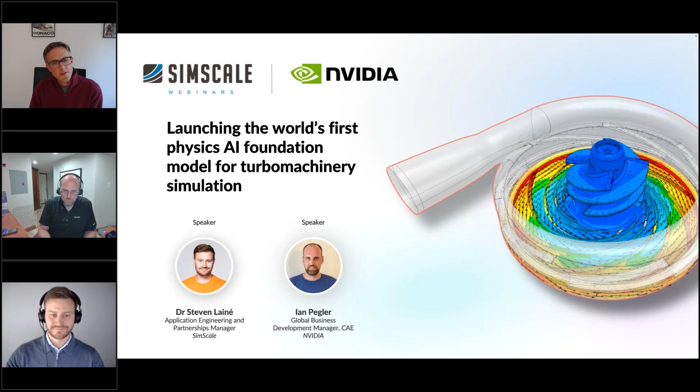Perfect. Thanks, Alex. So first of all, I'd like to give a very short introduction to SimScale, and then Ian will give us a short introduction to NVIDIA and the technology that's being used today. And then we'll get into the details of this exciting foundation model that we've released for pump design, including, of course, some live demos of this capability in SimScale.

So first of all, welcome everyone, and I'd like to introduce SimScale first. So we're an established simulation company. SimScale runs entirely in the web browser, in the cloud, so you'll see that during the demos. And we have about 600,000 users worldwide now across 50 plus countries. There's millions of simulations being run all the time in SimScale, and we're top of the leaderboards for G2 reviews for our software. So if you don't already know who we are, go and check out simscale.com and you can sign up and give it a try.

And what do we do? Well, our ethos is to empower engineers to innovate faster. And we do this by providing a high fidelity simulation tool that's truly accessible at any scale. You can see across the bottom of the screen some of the organizations that we work with. Many more, of course, we're not allowed to mention, but Rimac Automobili, the Croatian hypercar manufacturer, is doing just this. They're empowering their engineers to innovate faster by using SimScale. In the early stage in the design process, the designers are iterating very quickly through cooling channel designs using SimScale's platform.

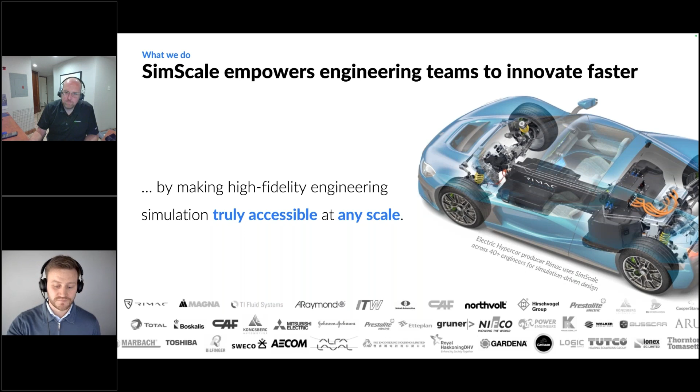So just another couple of overview points on SimScale, and then we'll get into the NVIDIA side. So SimScale is finding a lot of success in the industry by reducing simulation lead time, and we're doing this by an order of magnitude. Thanks to the differentiators of SimScale being completely cloud native, you don't need any local HPC or hardware to run simulations. Because SimScale is fully hosted in the cloud, it's very easy to collaborate. So wherever you are geographically, you're logging into the same cloud servers when you share a project and accessing the same data. This means that you can simulate across borders without having to transfer large data sets.

SimScale is completely scalable, so you can run really large simulations, you can run a lot of them in parallel, but that scales with your needs. So maybe today all I want to do is run a simple FEA linear analysis. When I submit that, a small machine in the cloud will be started, maybe a 4-core machine. But then tomorrow, maybe I want to run 1,000 conjugate heat transfer CFD simulations in parallel. I can do that without having to switch on any special license. I have that capability at my fingertips.

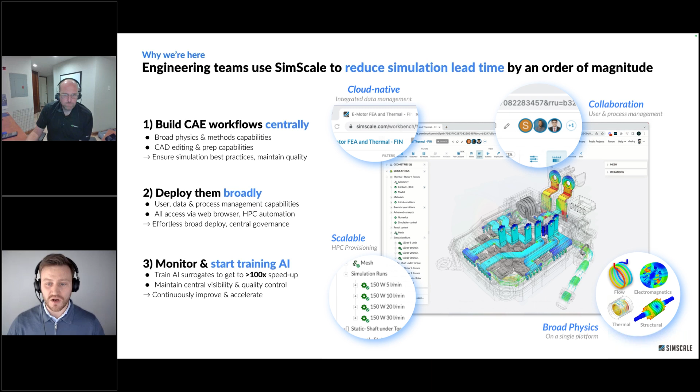So we have a broad physics capability as well. You can do thermal, structural, CFD, and electromagnetic simulations all in one simple, easy to use interface. And of course, all of that can be used to train AI models and surrogate models to get more than 100 times speed up in your simulation and maintain the access control and visibility through the organization of those AI models. And we'll show that in the demonstrations.

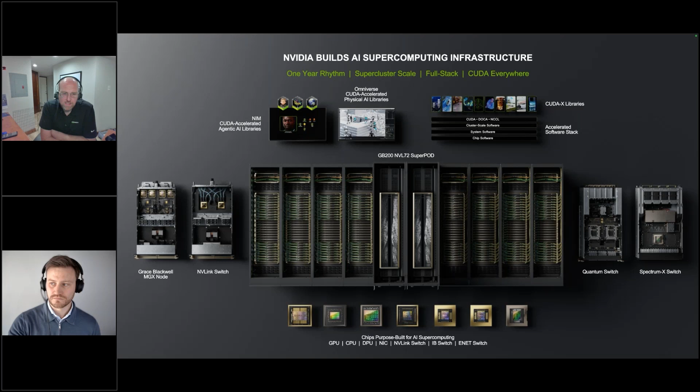And then sitting on top of that is probably our kind of secret sauce really, which is all of the software libraries that enable our development partners such as SimScale to build these awesome solutions. So CUDA, and then a whole range of other libraries to enable different use cases. So if we move to the next slide.

And why do we do this? What are we trying to achieve when it comes to computer-aided engineering? Well, ultimately, the story I think over the last few years of computer-aided engineering is we want to do things faster. Back when everything was testing based, you could potentially do one test a week of a design variant. And then obviously computer-aided engineering came along and we could quickly start to simulate these physical tests and maybe do one a day. And then with accelerated computing using GPUs, we can start to do even more different iterations today.

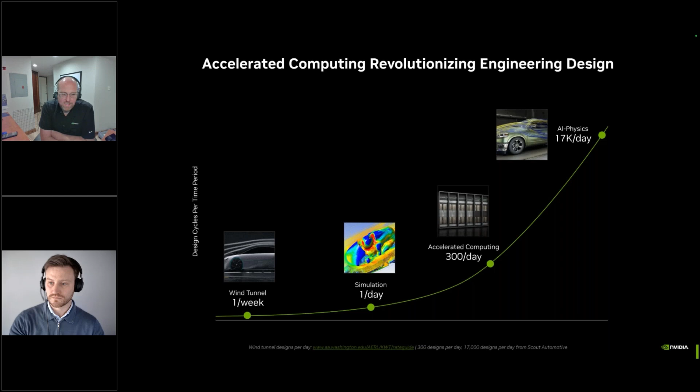And now with AI approaches, potentially we can run 17,000 different iterations of a design a day. So what it allows us to do is obviously hopefully make a better, cheaper product, because we can look at so many more different variations. So that's what we're really trying to enable, right? This revolution in engineering design to really improve the design in a much shorter time scale.

So we move on to the next slide. Then specifically when it comes to computer-aided engineering, how can we help accelerate that? We just spoke about PhysicsNeMo, but there's also a ton of other libraries and tools that we use. So CUDA, obviously, most people might be familiar with that - this is the way that you can program for the GPU. Then we have obviously PhysicsNeMo to generate the physics-based AI models. Then Omniverse is a kind of platform that allows people to create digital twins and bring different data together to create this digital twin experience.

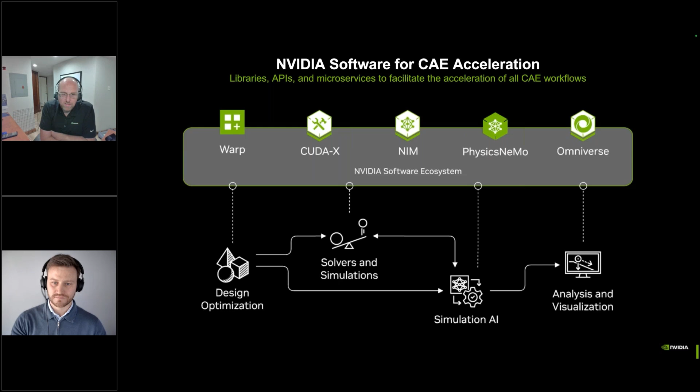But the key thing I always say to people is the key thing to remember about NVIDIA is we are a platform company. You know, we don't make tools. We build this platform for SimScale to build their tools on to take advantage of this underlying technology. So that's why I'm super happy to be here today to showcase what SimScale have put together using PhysicsNeMo into their platform. So if we move to the next slide, this is a little bit more about PhysicsNeMo.

So this, like I said, is our library of different AI architectures, basically, to help with traditionally computer-aided engineering problems. We've done use cases that cover all of these different application areas. So, actually, on the right there, cooling system design.

If you look closely, you might be able to see that looks like a GPU in a computer, and this is really where PhysicsNeMo came from. Some of our own needs to actually cool our own hardware, and then we developed it into a library that other people can use as well. One of the great things about PhysicsNeMo is it's not supposed to be a replacement for any traditional CAE, but hopefully it's a way to iterate faster and get more design iterations assessed, and give you a better design at the end of the day.

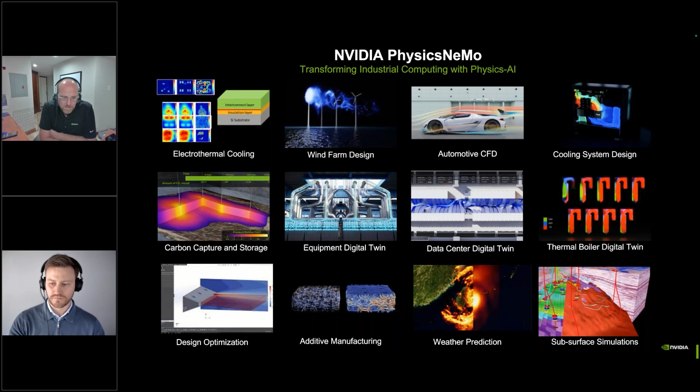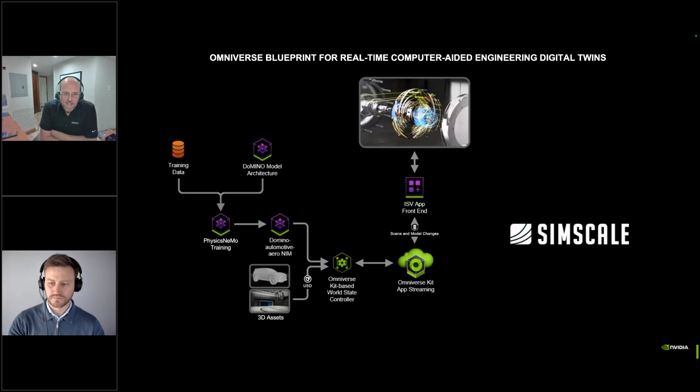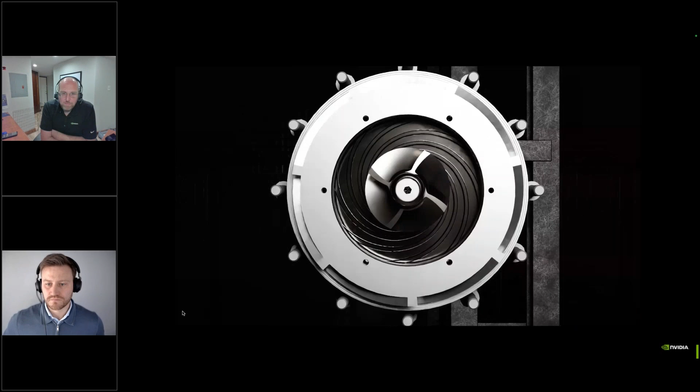So if we move on to the next slide, I like this slide because it shows perfectly how SimScale have leveraged some of the NVIDIA tools to build what Steve will show you in some of the demos after me. Taking some of the underlying tools we have, PhysicsNeMo, this framework, and the DoMINO architecture you see on the left, and integrating that to create the underlying pump foundation model, then integrating that into the SimScale platform to make it easy for you guys to use. You also see a nice animation of the pump, done using the Omniverse APIs. If you'd seen the NVIDIA GTC keynote session, you would have seen this video as part of the keynote as well.

So just shows you how we can help take some of the visualization stuff to the next level with some photorealistic rendering and bringing all this CAE data into one place. So hopefully that gives you a bit of an introduction to how NVIDIA helps accelerate computer-aided engineering, and particularly how SimScale have leveraged some of these platforms to help build this awesome pump model that's now integrated into their platform. So to get to more details, I'll hand it back to Steve to take you through.

Perfect. Thanks for that overview, Ian. It's really insightful. So what we're going to talk about now is exactly what we built and how we built it to deliver this pump foundation model, and also a bit of information on our strategy for AI in SimScale.

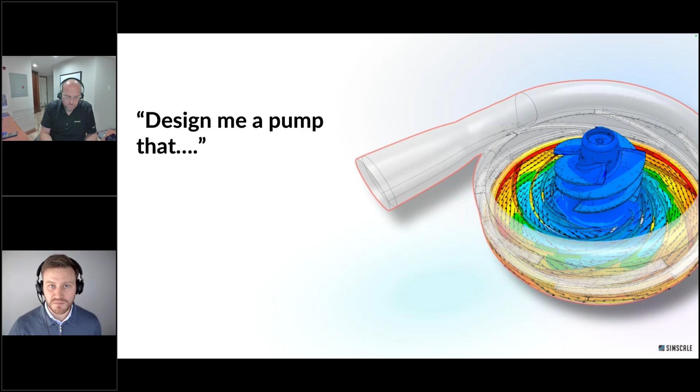So ideally, what we're aiming for here is a situation where you can say, design me a pump that achieves these requirements, has this pressure head, is the most efficient possible pump, pumps this type of fluid, and is this type of pump design.

Things like copywriting are being revolutionized with the use of LLMs and prompting. It's very easy to improve the readability of some text or do some background research.

Also, for image design, it's very easy to generate images that are royalty-free and show some of the specifics that you want to show for certain products or types of engineering.

And also coding, especially for people that don't code every day, the use of IDEs with embedded AI algorithms and LLMs are really helping to generate code and debug issues in code as well. So these things are all proven technology and they're already well adopted in the engineering industry.

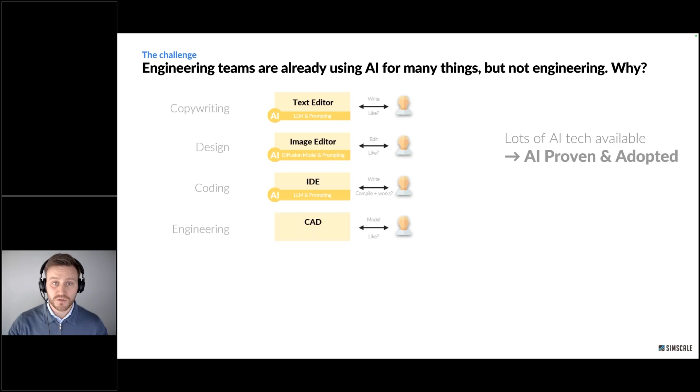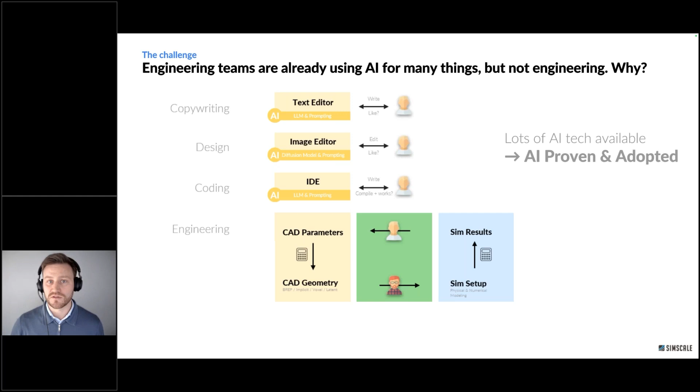But when it comes to the core engineering, so the design and simulation process, things are not so well integrated yet with AI. We're still using parameters from CAD, creating traditional geometries, be it BREP or implicit style geometries, and then sharing that with separate teams or separate pieces of software to run simulation setups, generate simulation results, and then loop back through to change the CAD and go through that loop again. So the steps between CAD engineering and CAE are fairly disconnected. There's no universal data type.

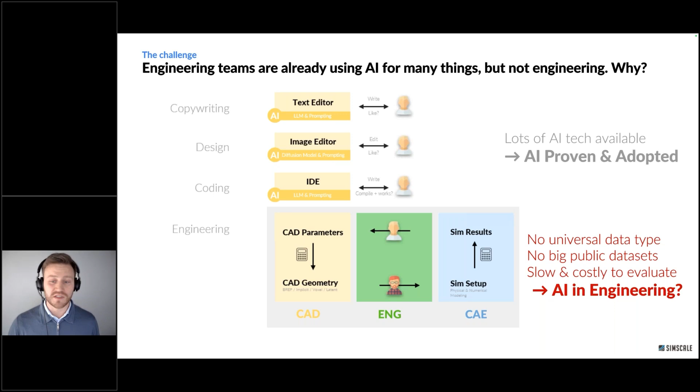And crucially, there's no large public data sets available to train these things on, so it's relatively slow and costly to evaluate. One of the great things about the internet is it provided a huge source of data for LLMs to learn from. But engineering data is typically intellectual property and it's not published widely for people to use to train AI.

So we had this come up a few weeks ago. It was actually Alex that came up with this idea, and I thought it was a great thing to cover today: the differences between using an image prompt versus actually doing engineering with AI.

So in order to address this, in SimScale we have 2 approaches right now. We're covering engineering and agentic AI, as well as physics AI. Physics AI and engineering AI are going to be working alongside each other to solve the same sort of problems. First of all, I'm going to focus on the physics AI.

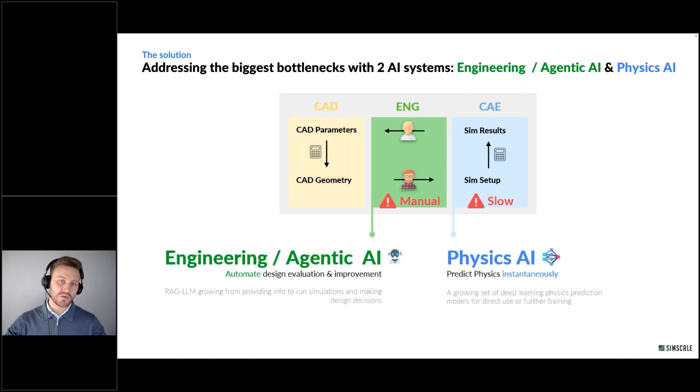This is the application where we've developed a foundation model with NVIDIA PhysicsNeMo for the pump situation. Then at the end, we're going to also look at the engineering agentic AI process and how this can all be pulled together with an AI agent to simplify the workflow.

So let's think now about how we build a foundation model. With the status quo today, if you want to create an AI model, what do you have to do to generate that? Well, the first thing is the data generation. You need to get your data in order, and you need to collate that from different sources, and prepare it so that it's ready for AI.

That might mean tagging, it might mean rerunning simulations. And then you need to prepare the AI model training. You need to have an infrastructure to manage that. You may also need to have the same simulations available that we use to train the AI, because when you do an AI prediction, you may not be happy with the results, and you might want to use the PDE solver technology as an alternative.

So this is the process, and what we're hearing from the industry is that it sounds great, but I don't necessarily have time to invest in creating this training data, or I'm waiting for the right project to come along that will give me enough data to train on. Or how do I know if it will produce sensible results for my application?

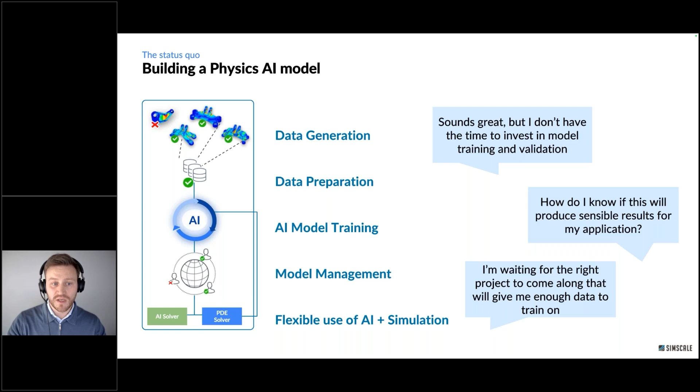So we're getting to the point now of the foundation model. And what is the foundation model? Well, what we've done in this first example is we've created a foundation model for a pump. This is basically a pre-trained AI model. You can take it today and use it on your pump designs.

And it gives you insights straight away, potentially. But the other fantastic thing about having a foundation model is it creates a base level, a base camp that you can use in order to create a highly customized AI model for your data.

So we've already trained the foundation model that understands the physics of how pumps work. It knows what blades do. It knows what a number of blades being changed does. It knows about the outlet and the inlet. And then if you take that baseline and you add in another 50 or so of your simulations on your specific pump designs, you'll then have a highly tailored AI model that can predict the performance of your pumps.

So the idea here is we think that this should help to reduce the barrier to entry on AI projects. And this is the first example that we've produced, and we're going to produce many more of these foundation models in collaboration with NVIDIA.

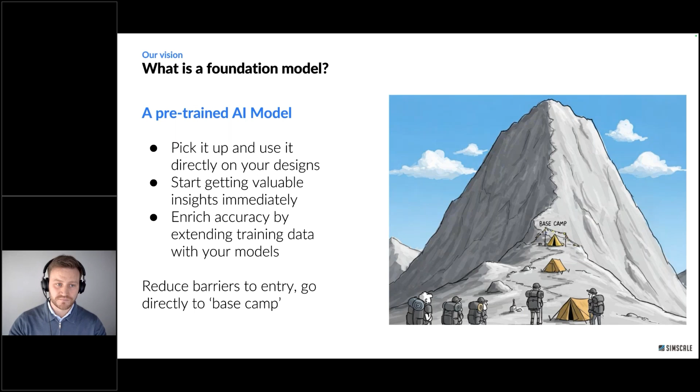So let's look at the foundation model for pump simulations specifically in a bit more detail now. So what we've done is we've created a large data set of pump models with a huge number of geometry variations and different operating points. All of this comes together into a simulation data set that has thousands of simulations in it. So this is the great thing about us making this available, because we've done a lot of the hard work to prepare this foundation model. It can basically be a training model that you use in the future for your own one, as I described.

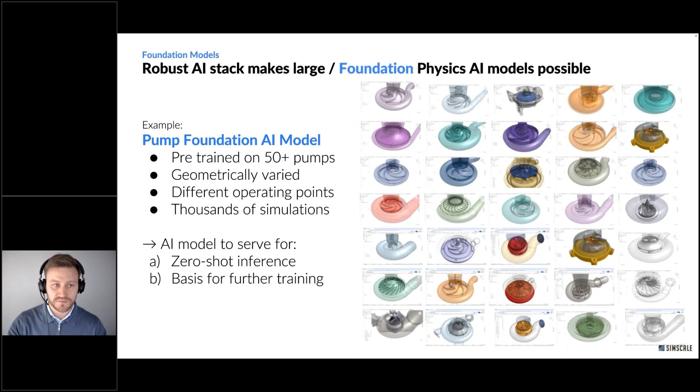So we took that large data set and then we used NVIDIA PhysicsNeMo to create an AI model, a graph neural network AI model, to be able to make pump predictions. You can use this through the UI, as I'll show you, but you can also use it to make instantaneous predictions of what the result would be for something like an optimization. And this is one of the really exciting applications that we're seeing AI models being useful for.

A traditional optimization study may take days or weeks to complete because you're fairly limited in how parallel those simulations can be, because you're reliant on the previous simulation finishing and the results of that simulation to inform the optimization algorithm what it can do next. But if that simulation is an AI model and it takes 1/3 of a second to complete, you can iterate much faster through those optimizations, and you can do a real-time optimization.

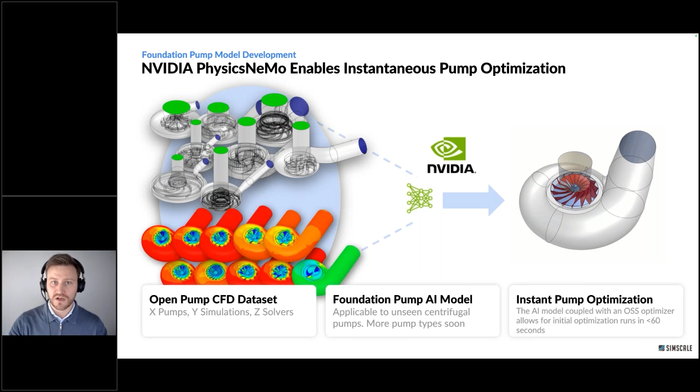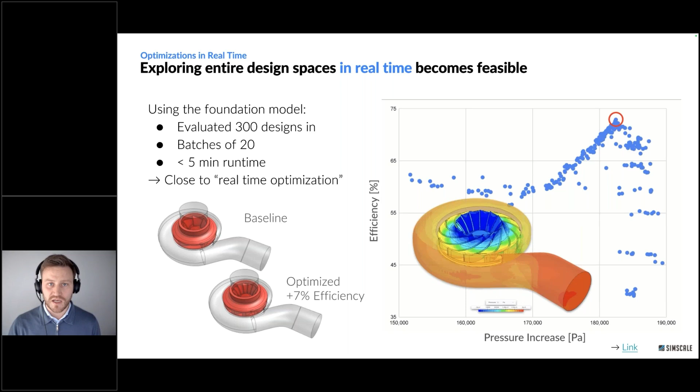And you can see how we're optimizing for efficiency versus pressure increase for this pump. And after each batch of predictions, the geometry is changed in order to hone in on the optimum efficiency area that you see in the top right of the plot. So you can obtain this within about 5 minutes, which is obviously ridiculously fast. And then you know the parameter space of interest for the operating regime. And then you can investigate this in more detail with full simulation to validate the results or use physical testing.

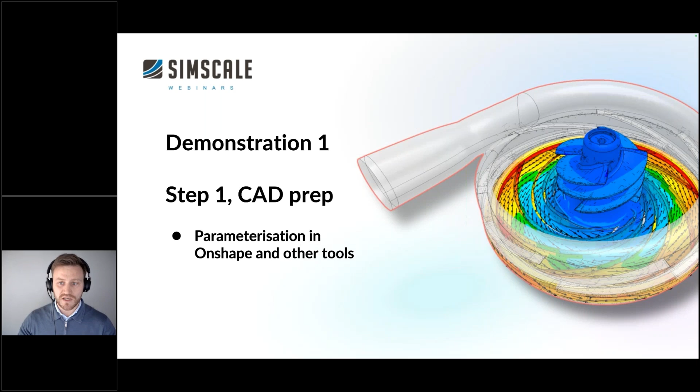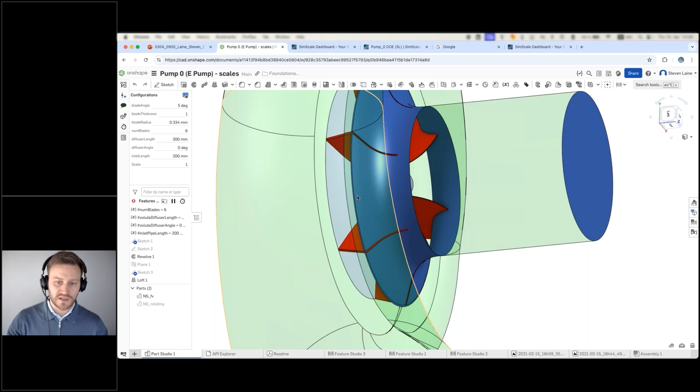Okay, so that's a bit about the background. And now I want to show you some demonstrations of how this actually works in SimScale and how we make this a reality. So for the first demonstration, I'm going to show you an example of how we set up the CAD geometries for the actual generation of the data for this foundation model. So I'm going to show you how this works in Onshape. This can obviously be done with any CAD tool. Siemens NX, Creo, CATIA, whatever CAD tool you're using can be used as the input geometry for generating a foundation model.

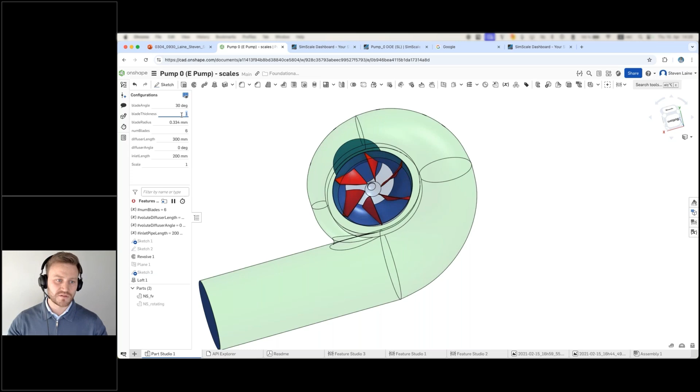So we created many different CAD models by parameterizing them, and you can see here the parameters that we can change, and I'll show you how this works through the UI. But obviously, in reality, this would all be driven via a script through the API. So if I change the settings that we have here, you can see the geometry changing. So if we change the number of blades to a much higher number, we'll see the number of blades generated increase drastically. And this is just how we build up the parameter set.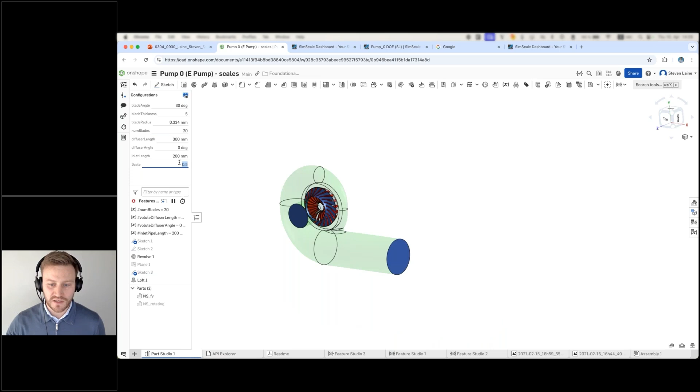And then obviously we're using a genetic algorithm or another way of iterating through all of these different CAD designs by changing the parameters that you see here, including things like scaling as well, so that we can understand how different sized pumps are going to respond, and as well the diffuser angle and diffuser length. So we're looking not only at the impeller, but also the volute, the type of pump, the diffuser, and this is just one of the pump geometries. We had many different pump geometries that were parameterized in this way to create the data set.

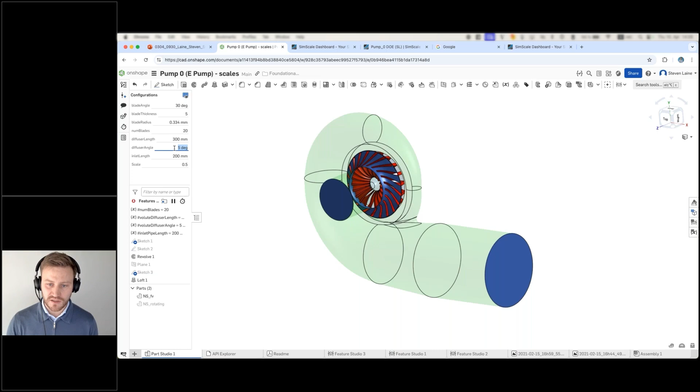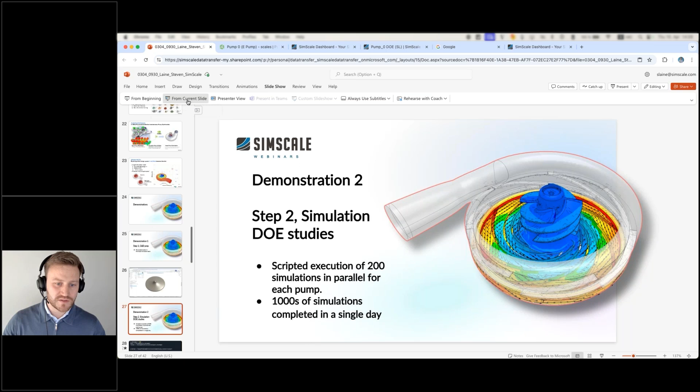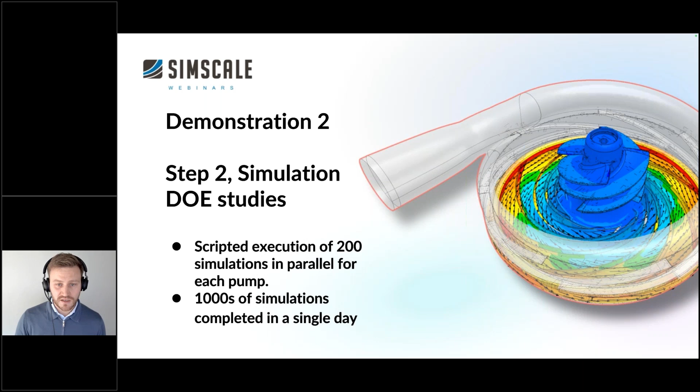Okay, so then that's for the geometry generation. The second demonstration I want to have a look at now is how we can actually execute this programmatically and create the data set. So in reality, there isn't very much to show here. I've got a very short video here which shows the number of lines required to actually generate hundreds of simulation-ready data sets from one of those parameterized models.

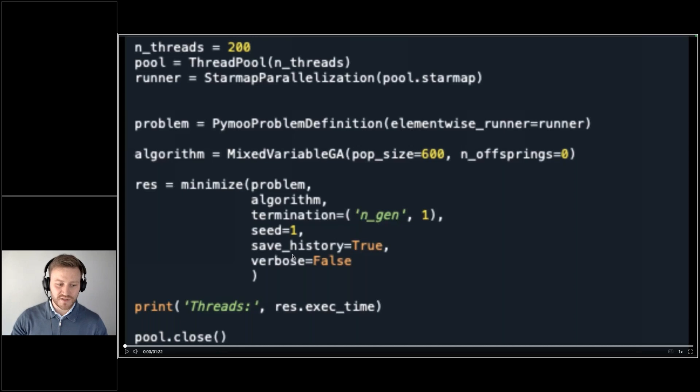So I really don't like showing code in a demo, so this is the only time I'll show any. But this is an example of what you need. So we're running 200 in parallel in this case, and then 600 in total. And rather than showing the rest of that video, I'll show you live in the platform what we have here.

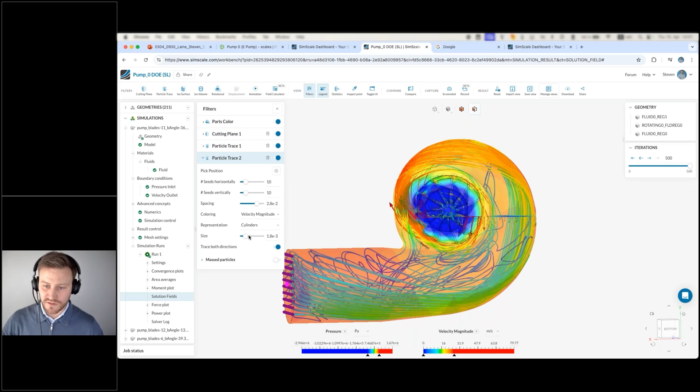So long as your pump complies with those geometric limitations, then you will be able to predict the performance of it using the foundation model. So here's an example of the data set that was generated. This is from one of the DOE runs. We can see one of the pump results here on the screen, and we can see this project contains 211.

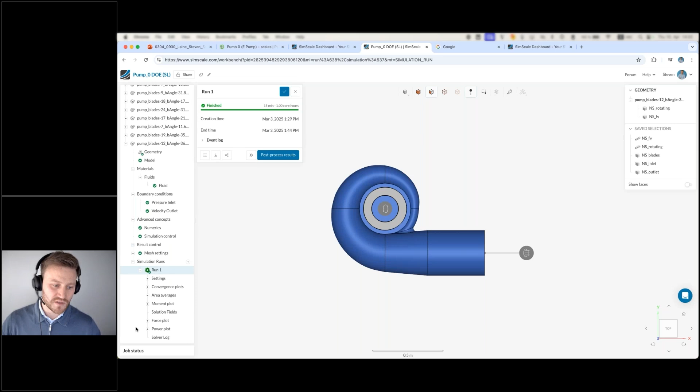So there's a huge number of these pump simulations, and they range from taking about 30 minutes per simulation run. So this one ran in 31 minutes. I think the one at the bottom was slightly quicker. Yeah, that one ran in about 15 minutes. And the important thing to note here is that these are parallelized. So we ran batches here of about 200 in parallel. So within a day, you can generate thousands of simulations with SimScale.

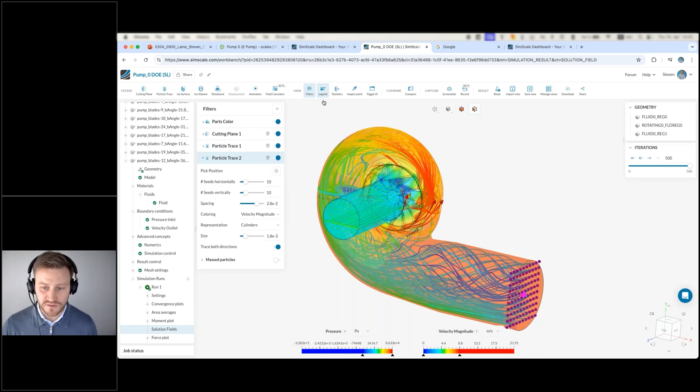So it's really powerful to be able to leverage the capabilities of the cloud infrastructure to be able to generate these data sets for foundation models or AI models in a very short amount of time compared to how long it would take to generate these sorts of data sets with traditional on-premise tools. Okay, so we've gone from generating the CAD through to now the simulation data. So once we've done that, then we're ready to start training. So the third point here is how we actually train the model.

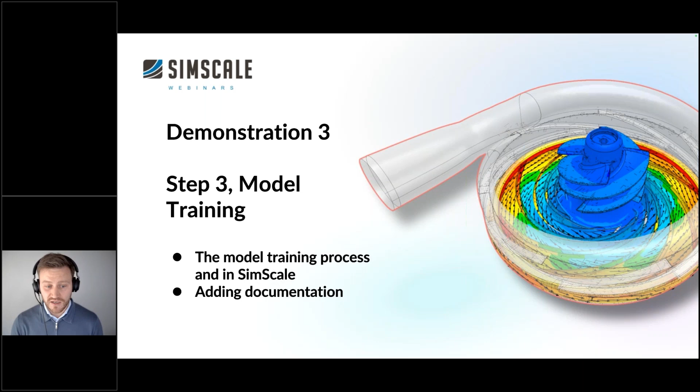So I'm going to show you, as I mentioned at the start, SimScale has an end-to-end process. We don't need to go out to any clunky tools in order to create the training data or clean the data. Everything is integrated into one end-to-end solution. So in order for me to train a new model, all I need to do is visit simscale.com and go to my dashboard and start setting it up.

So as an admin of SimScale, I can control who has AI training permissions. So that's available in the dashboard. I have that permission, so I can go from here and I can create a new AI model very easily. So I'll say pump example here, and I can give it a description.

Then I go to start the training, and this is where I then go to select the data that I want to use. So in this circumstance, I'm just going to navigate to an area that we have for all of these pump foundation models. And I'll use one of these projects as an example for the training. Obviously, for the foundation model, we used all of the projects that are available here to cover a very wide data set for all of these pumps.

And this process is something that can be done by any engineer in the organization. It doesn't need to be something that the expert machine learning team does. It's very accessible straight in the browser, so you can add the projects that you want to use and set up the different parameters for your training directly here.

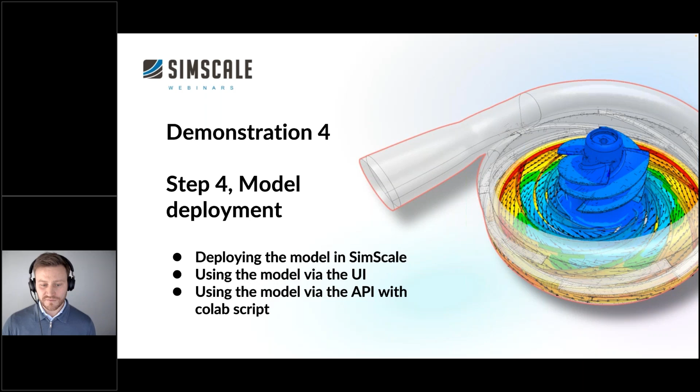So that leads me on to the fourth part of the demonstration, is once we've trained this model, then how we deploy it to the organization, and also how we use it, both via the graphical user interface and the API. Okay, so the last point then is how we then deploy this within the organization.

So what I'll do is go to the AI model training section and show one of the example foundation pump models. You can see this one's had fairly extensive use, about 4,000 runs so far. And here we can see it's in the released state. And if it wasn't released, I would just go here and click release, and then I would make this available to the organization. I can see the details of the regression analysis that was performed during the training here as well. So I can just verify the results that I've got and then publish this out to the organization.

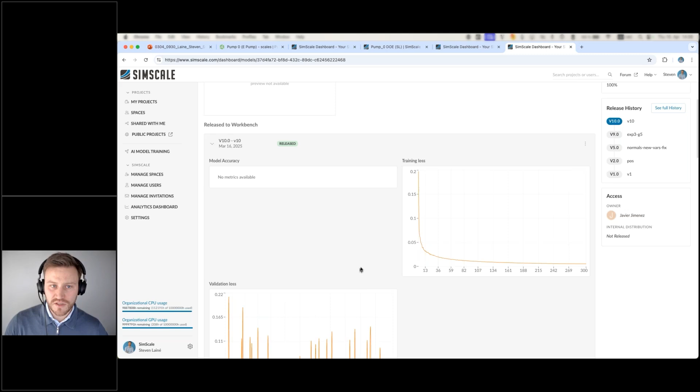So let's have a look how we would actually use this in the UI. So in order to do that, I'm going to create a new project here, and we'll populate that with some CAD models, and then we can do some predictions. So create a new simulation project. And then I'm going to import some CAD geometries in here that I want to simulate. So I'm going to do this by populating this from a template where I've already got some pump geometries that we can use.

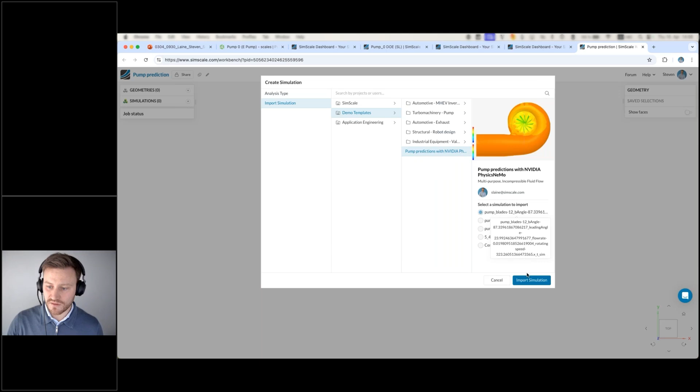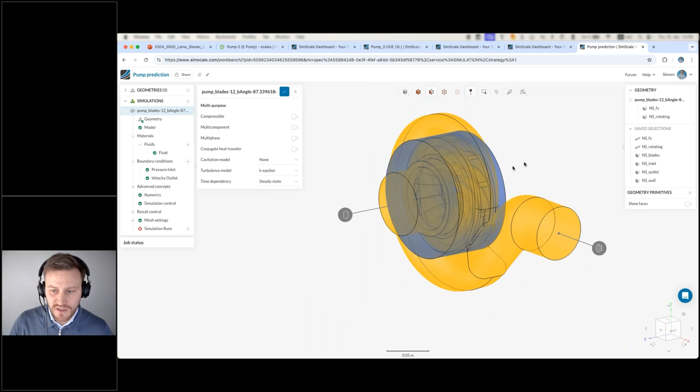So here I've got one geometry. You can see it's a centrifugal pump. The inlet is aligned with the Z direction, the outlet is aligned with the X direction, and the rotating region, the impeller, is rotating counterclockwise around the Z direction. So that meets the requirements of the foundation model. So I can go and switch on the foundation model here now to get a prediction of what the performance of this pump will be.

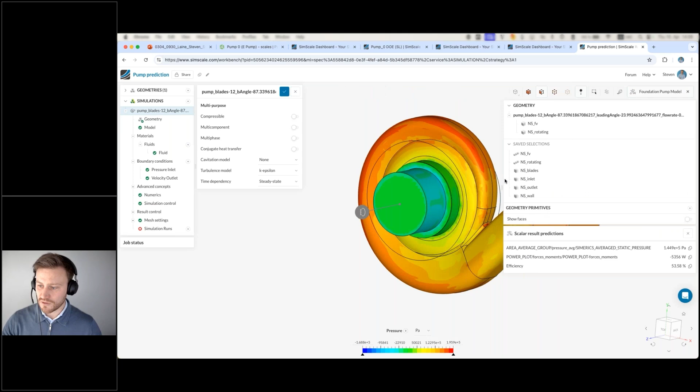You can see it literally takes a few seconds to load in the UI. We're already getting a prediction of the efficiency and the scalar values that we're expecting to get out of here. So we get the forces and moments and the pressure increase produced by the pump, and the efficiency. So it takes a few seconds more to do this through the UI than it does via the API. It takes less than a second via the API. And that's obviously for one geometry.

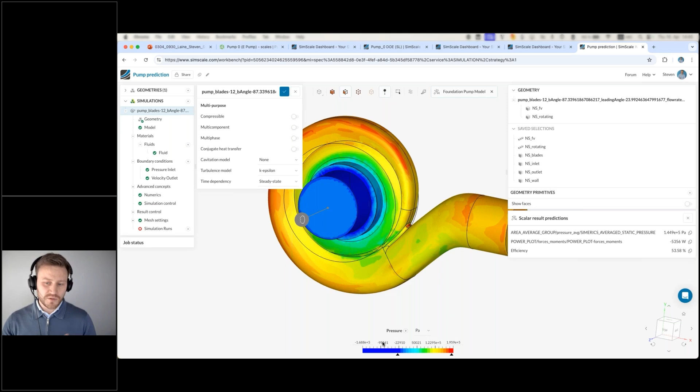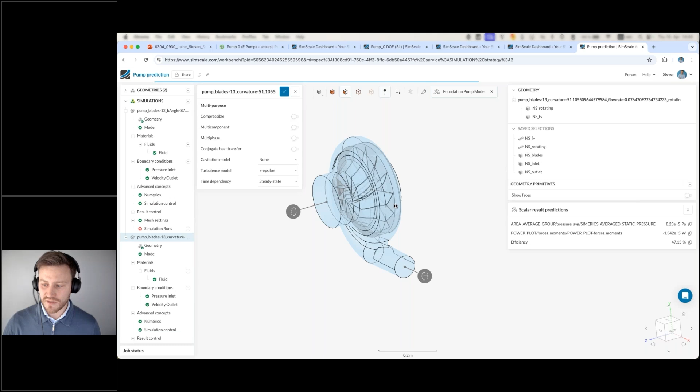It's very easy to interact with the result and see how it works. And we can also bring in many other geometries as well. So I'll show another example now as well. We'll have a look at a different geometry, completely different pump, much larger impeller, completely different volute design. See, the inlet is still aligned with the Z direction, the outlet aligned with the X direction. And again, we can see the prediction of the performance along with the key metrics that we want to get out.

So let's just show one more. It gets a bit samey after doing a couple, but let's just show an example of one more result here. Another different geometry, the same geometry that I showed the parameterization of actually. And again, in a few seconds, we get the performance predicted on the CAD geometry. So you can see how this can be used really quickly to iterate through different designs.

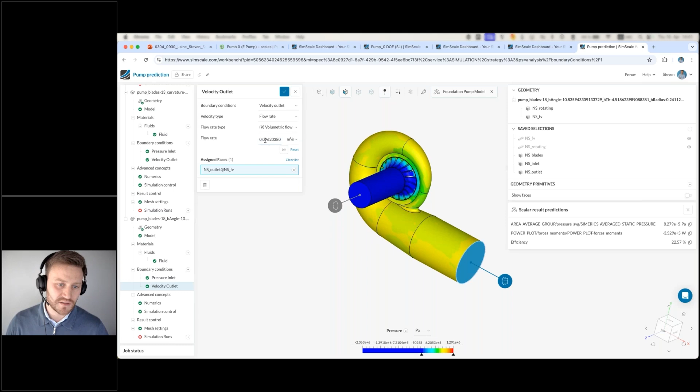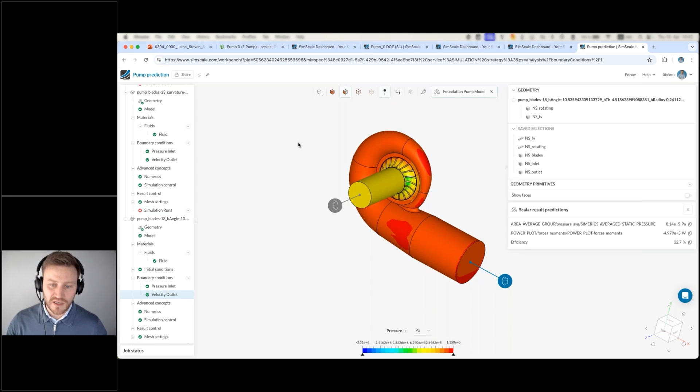I've mostly showed CAD changes here because I think that is the nicest thing to show, but of course I can make changes to the boundary conditions as well and predict the performance based upon that. Again, I'll get an instantaneous prediction of the performance from a boundary condition change. And the beauty of this is this can all be driven through the API as well. So this can be integrated into an optimization algorithm or into other workflows, integrated into a control system, called from another tool. The opportunities here are endless with integrations through our open API.

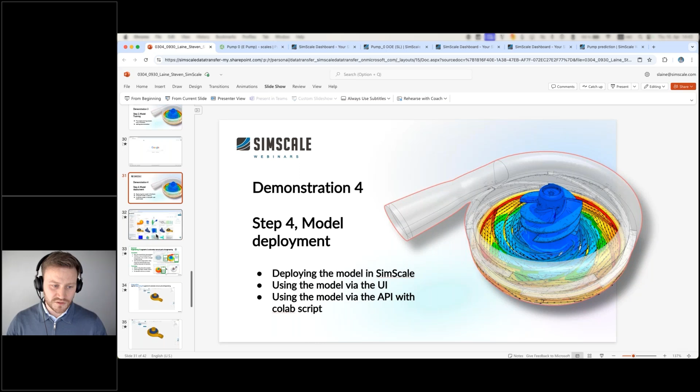Okay, so that's what I wanted to show from a demonstration point of view. Now, in order to talk about how all of this gets tied together, there's one last thing that I want to go through, and that's how agentic engineering AI can augment this together and automate the manual processes that are usually done by an engineer for something like this.

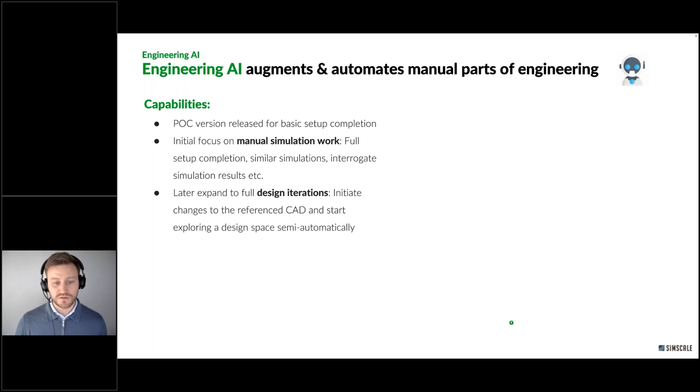So we have a POC version available of this now that works as an AI agent that removes the manual setup requirements and simulation work needed to actually prepare a geometry, set up the simulation, and then do an optimization study. So how the engineering AI runs in SimScale is it's an AI agent that you talk to just like an LLM inside the SimScale platform.

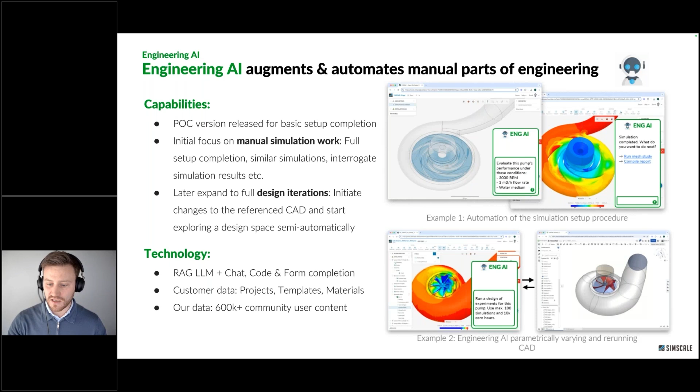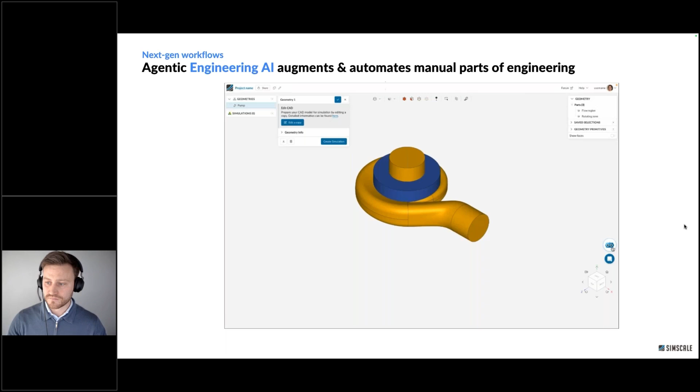So let's have a look at how this actually works. And this ties together everything we've just talked about with the AI foundation model, the use of templates, running PhysicsNeMo in the background to make predictions, and also run an optimization study. So let's have a look how this actually works in this example.

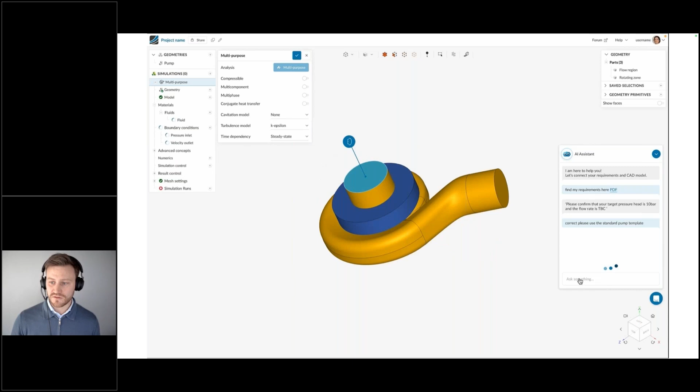So here the user is talking to an AI agent directly in the platform, and they've uploaded the requirements PDF for an RFP for a pump. The chatbot can then identify using an LLM in the background what the requirements are in there. So it can see that the required pressure head is 10 bars, and then it can set up the simulation using a pump template in SimScale. So it knows the tree structure that's required, and then it can prompt the user if there's anything missing.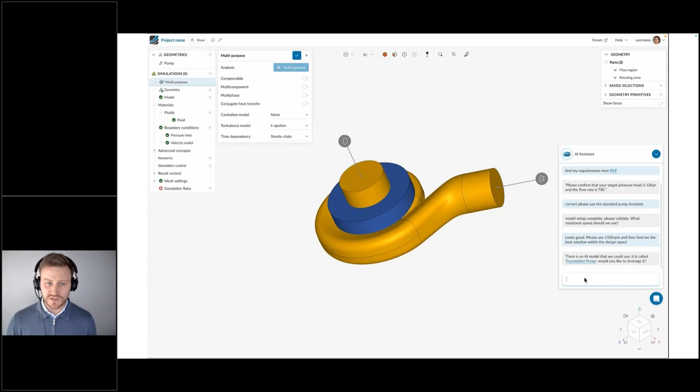So in this circumstance, the rotation velocity was missing, the rotation speed of the impeller, and the user just prompts it to say, yes, that's 1,500 RPM. And then the AI agent says, well, actually, there's a foundation pump model available in SimScale that would meet these requirements. Should we use this to predict the performance?

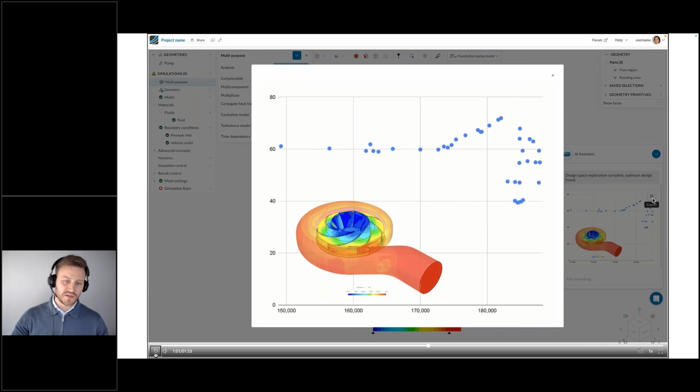So the user accepts that, and then we actually go through to the process of the AI agent helping to run an optimization study. So here it's set up an optimization study and identified using that foundation pump model the region of interest for optimal performance. And then obviously as a next step, we may want to run a validation CFD result and interrogate that in more detail. So you can ask things like, is there cavitation occurring in this design?

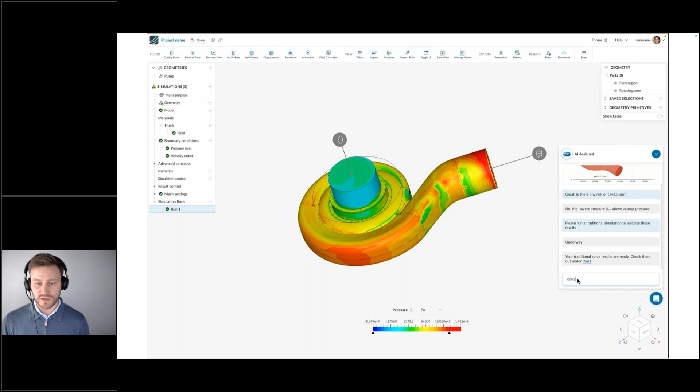The agent will then check, make sure that there's no pressure below the vapor pressure and confirm that there wouldn't be any cavitation. It can do further processes like run the final validation simulation run and also do things like produce the final PDF report. You know, all CFD engineers love simulating but hate doing the final report. Why not automate that process and have all of the simulation results produced in that PDF report automatically at the end?

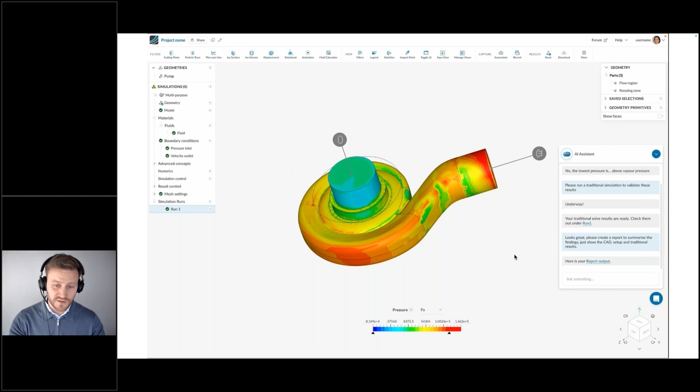Okay, so that's the final demonstration. Just as an overview of what we've seen, SimScale provides a fast path to mature physics AI and agentic engineering AI. You can get instant simulation predictions in the UI and also run instant optimizations as well, thanks to the end-to-end process that we've implemented for AI.

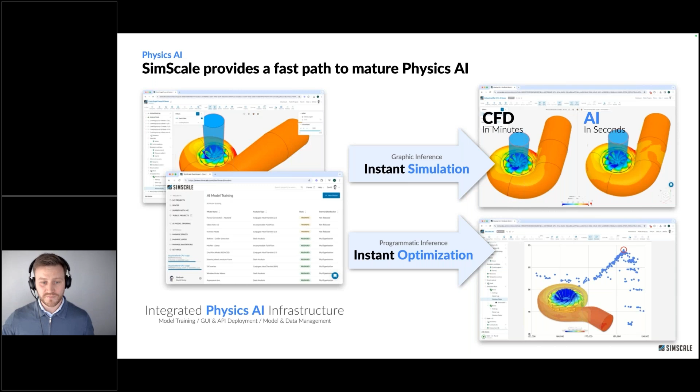Also, we want to make this as open source as possible. We want to invite you to see what you can do. So as a participant of this webinar, we will make available to you a Colab script. Now, I really don't like demoing scripts, so I didn't show you the script live today, but the whole process for running the optimization study has been published in a Google Colab script, and you can pick that up and run that very easily, and then you can replicate exactly what you saw here today.

We'll provide an Onshape pump model. If you don't already have access to Onshape, you can create a community account, and we've published this pump model as a community available model, so you don't need a paid Onshape account to access that. We will grant everyone who's interested access to SimScale for a couple of weeks with a professional license to be able to run this pump foundation model and evaluate the performance of PhysicsNeMo live in your browser.

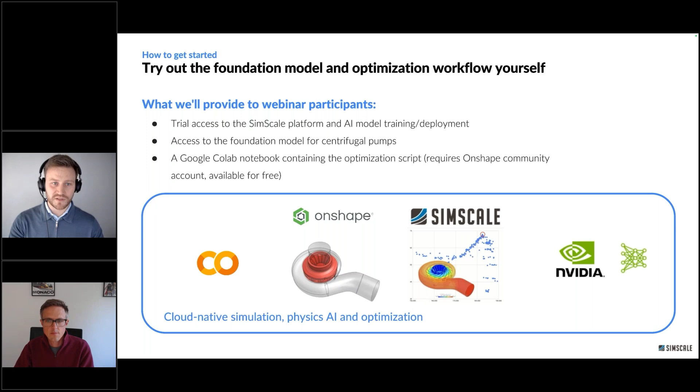Thank you very much, Steve and Ian. Great presentations, and very nice to see a live demonstration always as well. We've actually had a few questions. Quite a few came in just in the last few minutes, so I'm still going through them.